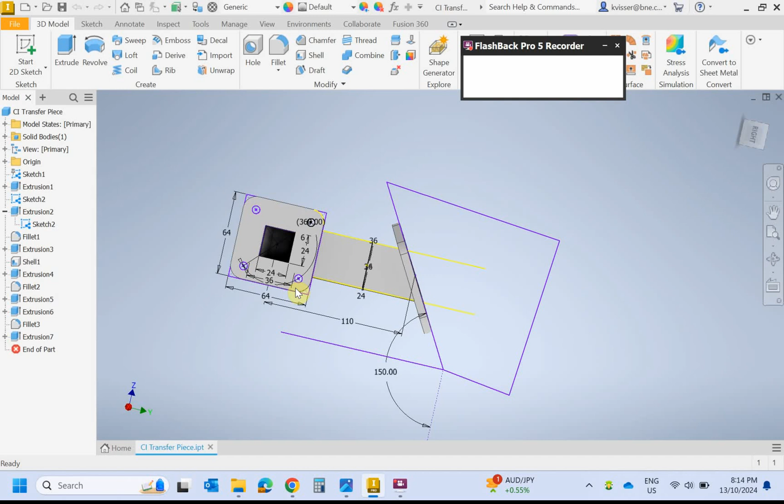Hey guys, just wanted to make a video on the transfer piece that you need to draw up. So there's a few different drawings floating around for this piece of assessment. I think they all come from the Boundy textbook.

But there seems to be a common error between the drawings, and it's the threaded hole. So for the purpose of this, I'm going to say that they intended it to be 6 holes at an M6. So we're going to model a diameter 6 hole here. We'll put a thread in it later.

When you draw this, it's pretty important. There's a few different ways you can draw it. I'm going to show you a method I've had the most success with when trying to do the shell command, because it seems fairly simple, but there's a fair bit going on here. So if you can't get yours to shell correctly, just make sure you really watch this video and have a look at the sequence in which the shell happens and where the shell happens, because if it's not in sequence, I haven't had much success with this.

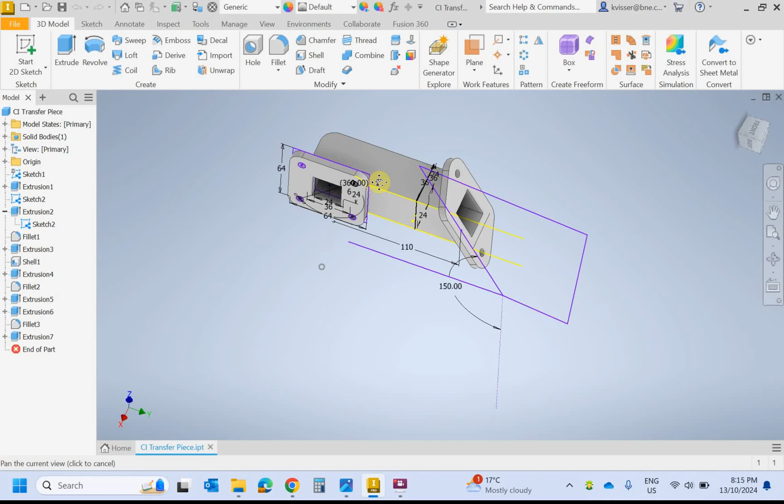So this is what it's going to look like when it's done in the 3D model. And we'll go ahead and get started because I'm going to draw it again for you.

So I'm going to start with a new standard, metric drawing, and I'm going to start a new sketch. If you take a look, my first sketch is actually going to be right in the middle there. The purpose and reasoning behind it will become more clear later on in the drawing, but it's to do with the shell, essentially.

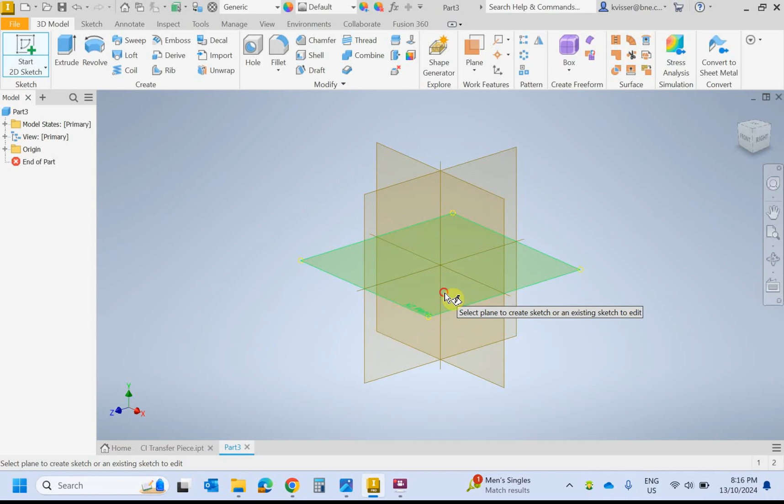So I'll start that new sketch, and I'm going to do a 2-point center rectangle. The outside dimensions for this tube is 36 by 36. I didn't first time around, but I will now.

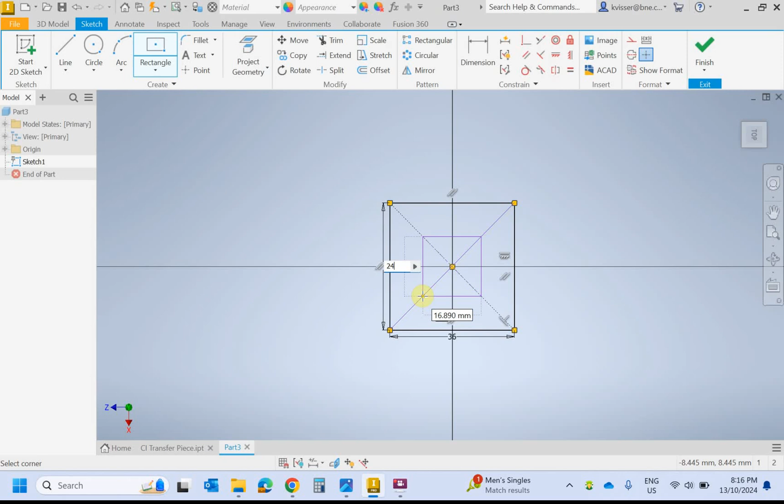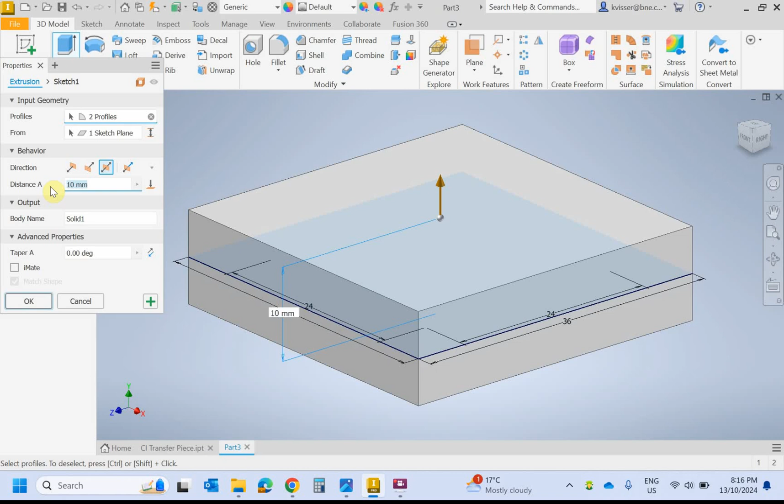I'm also going to put the internal for this, but I'm going to extrude it as a solid. Once again, that's for the shell we do later on. So when I go extrude, I'm going to select both profiles, do it symmetrically, and I'm going to need about 180 mil in this shape. The reason I say about is because part of this drawing, we're going to trim this down later. So there's my 180 mil.

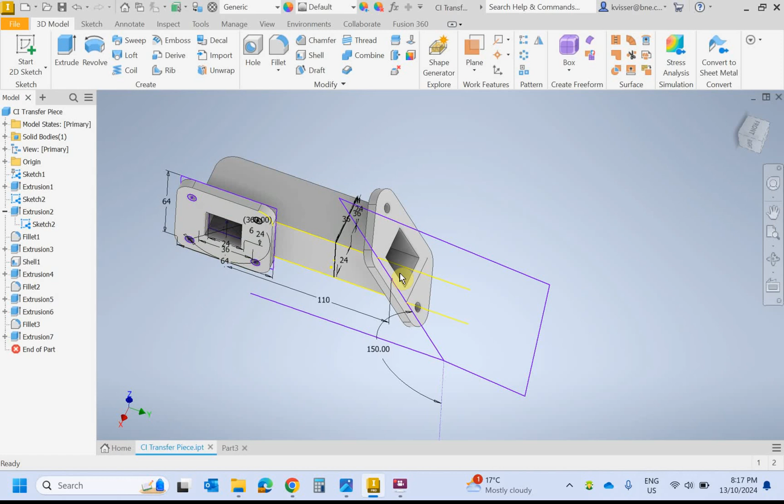Essentially what we've done is we've created this bit of pipe here. I'm now going to just do this part of the drawing, and then we'll extrude the other part. So if I select this face, I'll start a new sketch there. I like to just rotate it in the orientation, I've already sort of got it in my head as such.

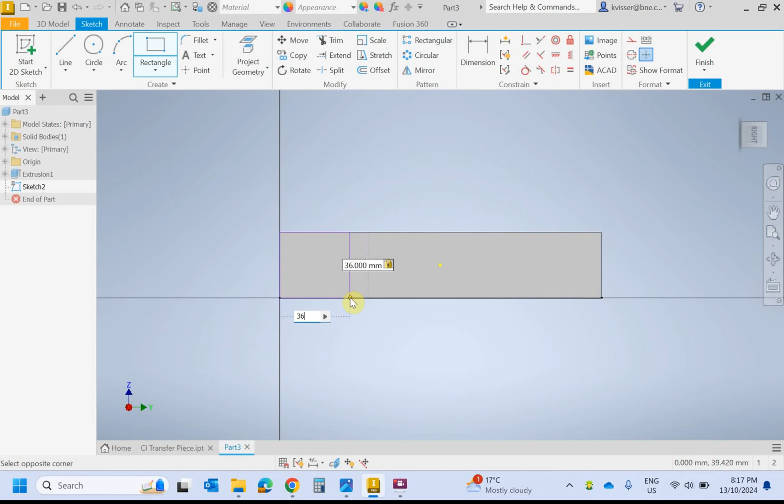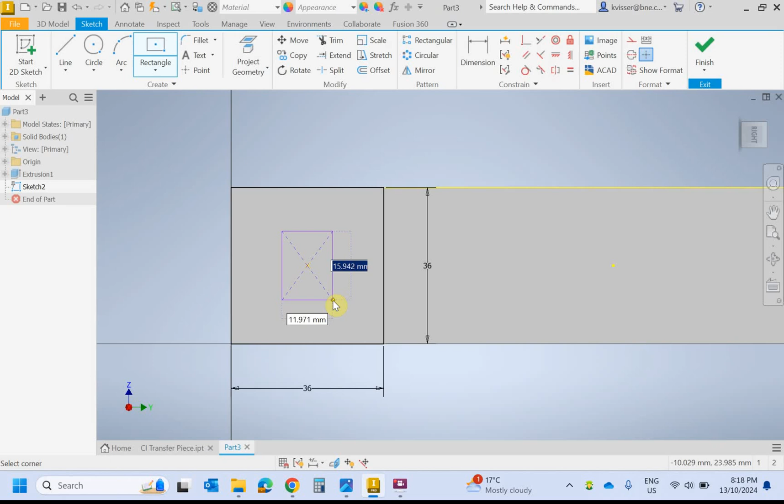So I'm going to do a 2-point rectangle this time, and just for ease, I'm going to do this one 36 by 36. I don't actually need the outside one there, but it's just going to help me to get my next one if I did it 2-point center. So it's going to find the center of there and the center of there, and it should predict it like it just did then for me. The dimension I'll need here will be 24 by 24.

So going back to our drawing, there's our 24 mil square, and there's our 36 by 36. Excuse me, something stuck in my throat. Now, that 24 by 24, the only reason I did the 36 was just to centralize it. You could have drawn the 24 by 24 and then used the dimension tool, same but different. Wouldn't really slow you down at all.

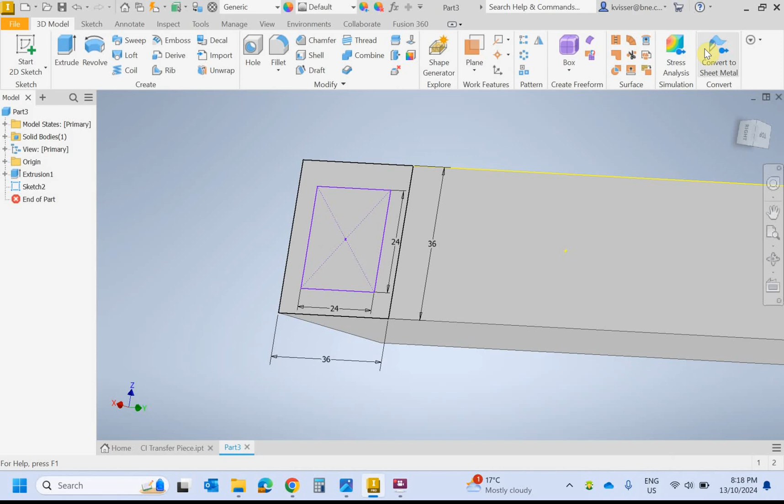So I'm going to finish that sketch. I'm just going to leave that there for now. I don't actually need to do anything with that yet. I've got a bit more stuff happening here, and I'll do it on the same sketch actually, so just open that back up.

Now, if you go to the drawing, this face says face incline 60 degrees to horizontal. So that's that face there. The key dimension that you need to pick up here is that from that center line, when they project it across, we're going to need 110 mil that way. Okay, so to get that, let's have a look.

So if I was to just draw a line, there's horizontal, and at the moment I'm getting a readout of 90 degrees, either way I'd do it. They wanted 60 degrees to horizontal, so there's 90, and if I start going down there, if I was to go 60 degrees, and that's reading 90, 90 take 60 will give me my 30. So I'm not worried about length, I'll just go tab, type in 30 for my degrees. That is now 60 degrees to the horizontal.

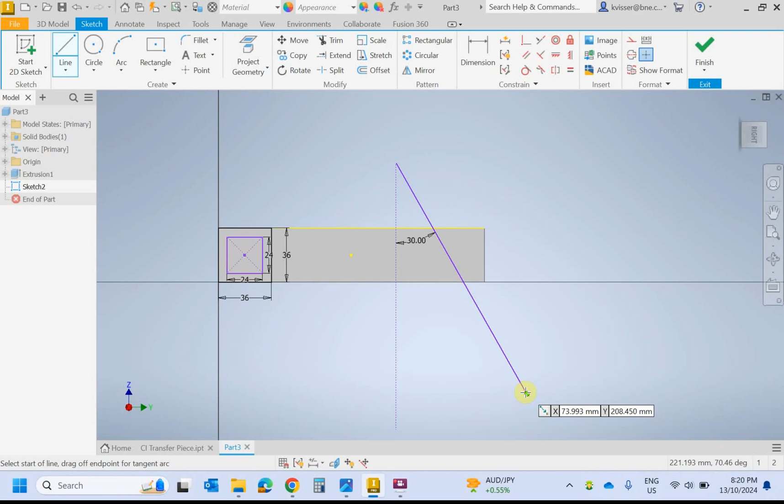And if you double check that, which you shouldn't have to, but draw a horizontal line and then dimension it. So before I create a profile here to cut this section off, I'm going to dimension it from the center of that one there. I'm hoping to pick up the center of this line.

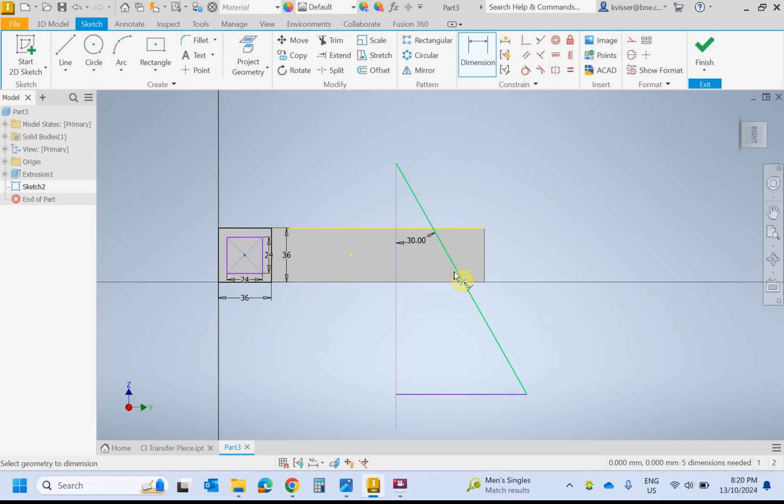Delete that for now.

Or why I'm not getting the center of it. I got it last time I did it. It's a bit of a bummer. Bear with me.

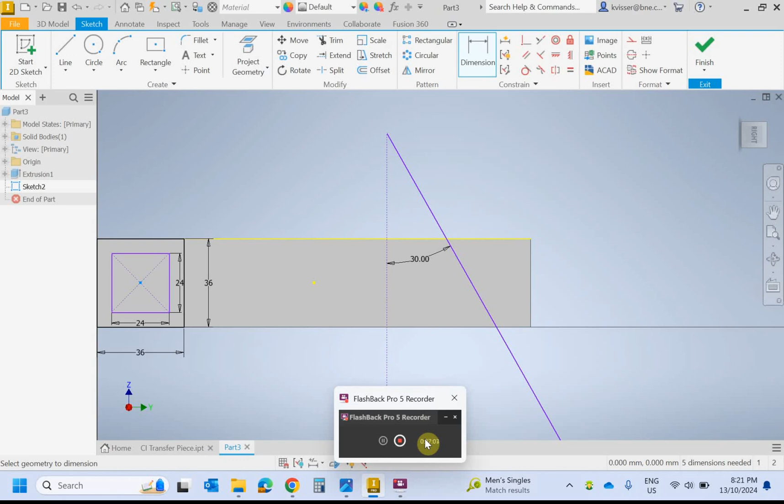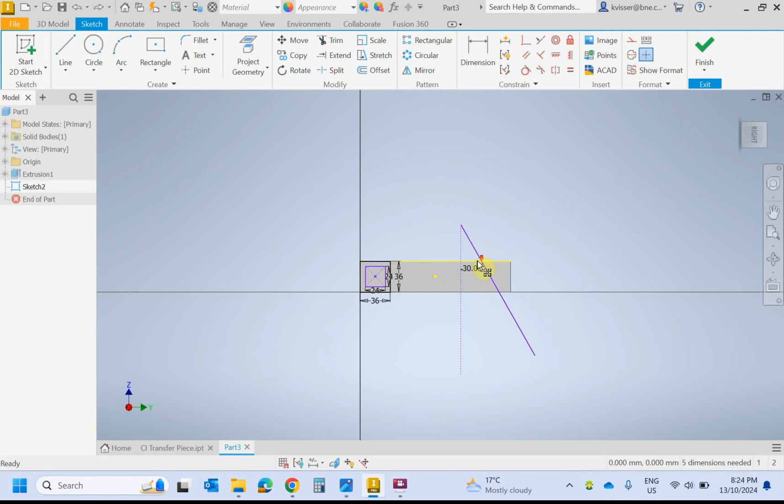Okay, so simple solution as to why that wasn't finding the center. I'm glad it didn't work for me - it didn't work for me the first time either, not sure why. However, because this line's not perfectly balanced between that shape, if you just trim it so that it is,

you can then go dimension from there to there. And that dimension needs to be 110, I think. 115, let's check - 110.

Okay, that sorted that out. So it was pulling that square across and not allowing me to drag that. So if you just lock off the component that is being dragged when you try and dimension, that will save any issues there.

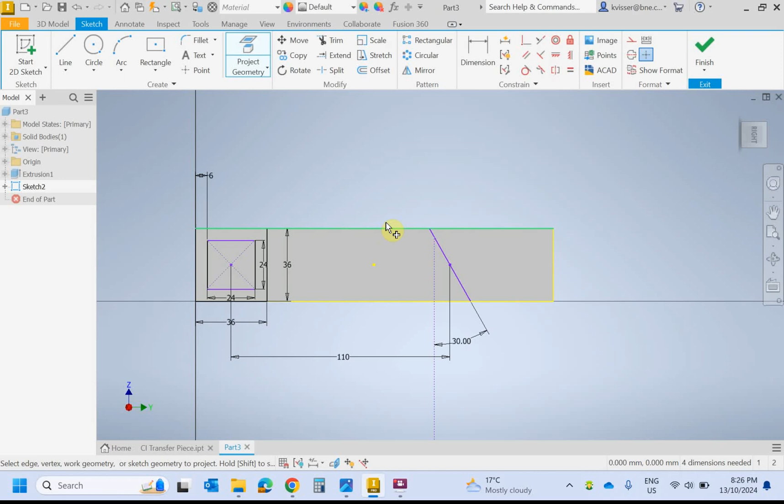So then the next thing I'm going to do, if it lets me, which it didn't before, I was going to use Project Geometry. Does it for the whole thing, that's all good then. And I'm just going to cut off this section here. So let's see if I can do that.

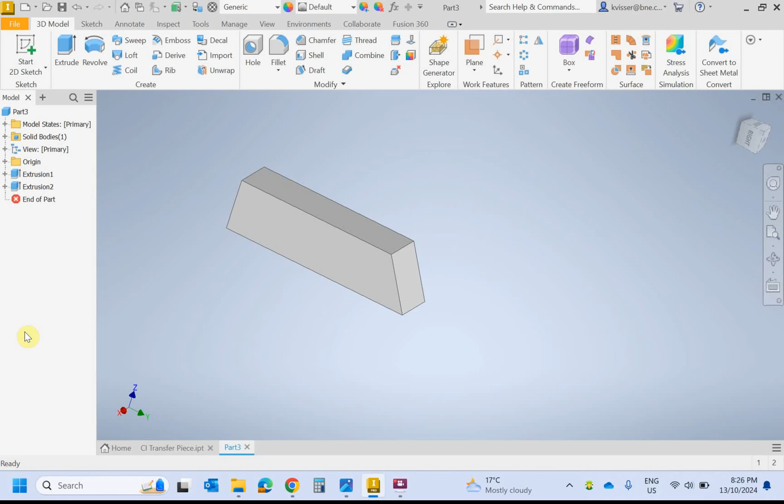So I can go the next step here, with my sketch 2. I need that back again because I want to do an extrude and then a shell. So to get it back, you right click on it and just turn on its visibility. I then have that geometry that I need.

So I'm going to extrude that surface inwards, subtract, and I'm going to do it to the wall thickness. If you take a look, we've got 36 and it's 24 square on the inside. So you do the math and it gives you a 6 mil wall thickness.

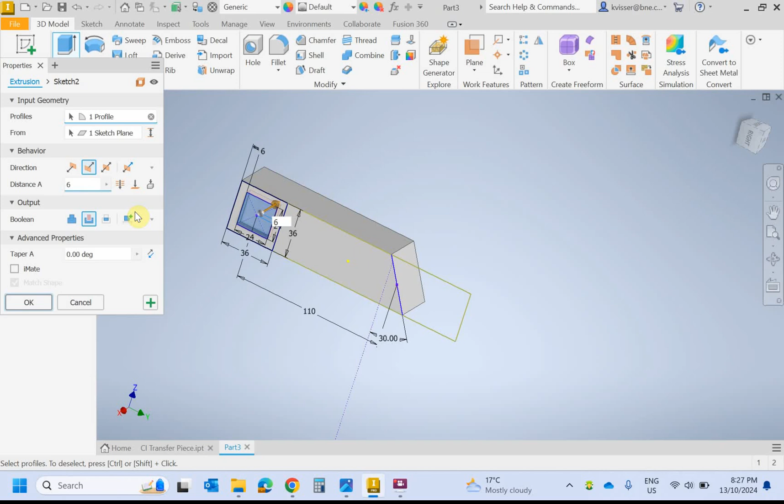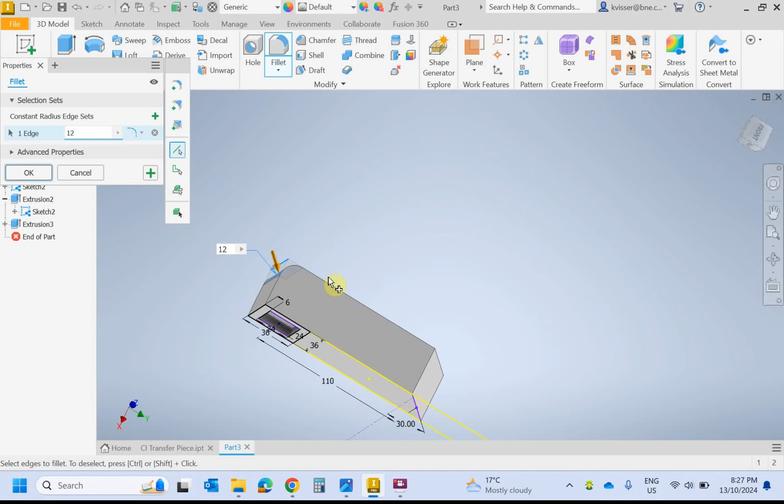So if I just make that 6 mil for now, that should work out pretty good. And I'm also going to put on my fillet on this outside edge, which is radius 12. I don't think it really matters if you do that before or after, but I like to do it before.

And so then I'll go shell, and I'll select that surface. Give that a 6mm wall thickness. And so you can see now, gives you a preview of what it's going to do. It's copying that internal wall there, and it's giving me that 6mm thickness.

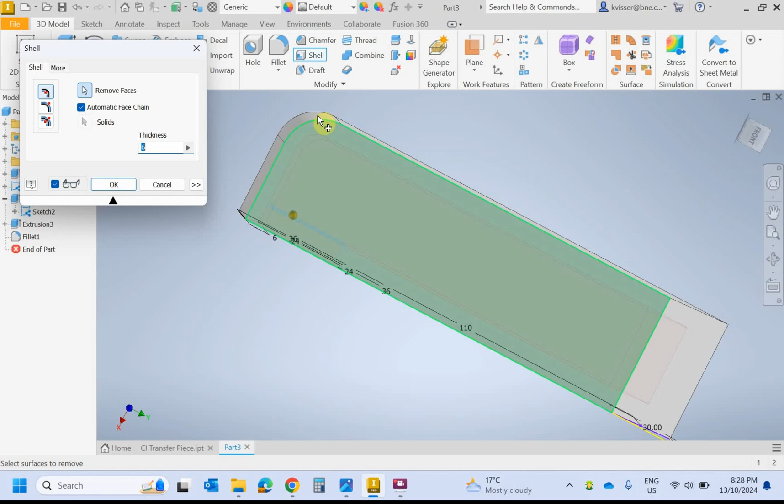So you'd like to think that if you did the fillet afterwards, it would update it, but I think it's nice to get the outside shape first before you do the shell. Okay, you'll note that it didn't cut through here, and that's why we did the drawing in the middle there before. That would have been an easy solution later on if you didn't think about that, but we'll just continue with this drawing here, and we'll pick up on it.

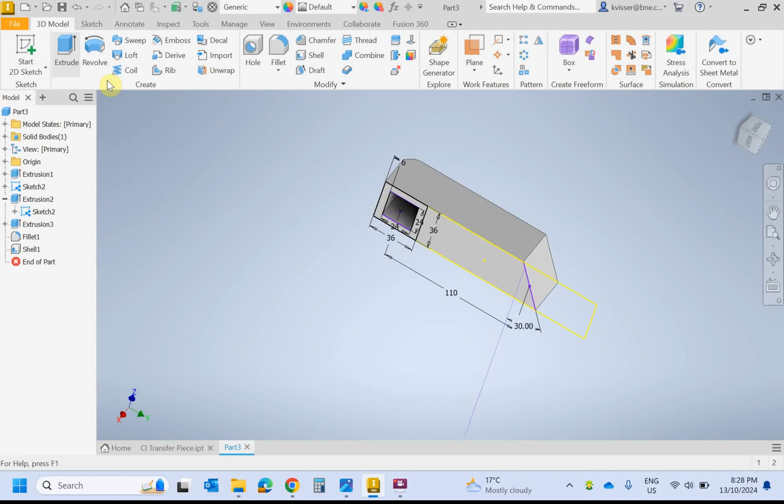So I might start a new sketch now, and I'll do it on this face, and we've got this 64 by 64 plate to do here. It's got 10mm radiuses in the corner, and I think that's where the issue lies with these holes.

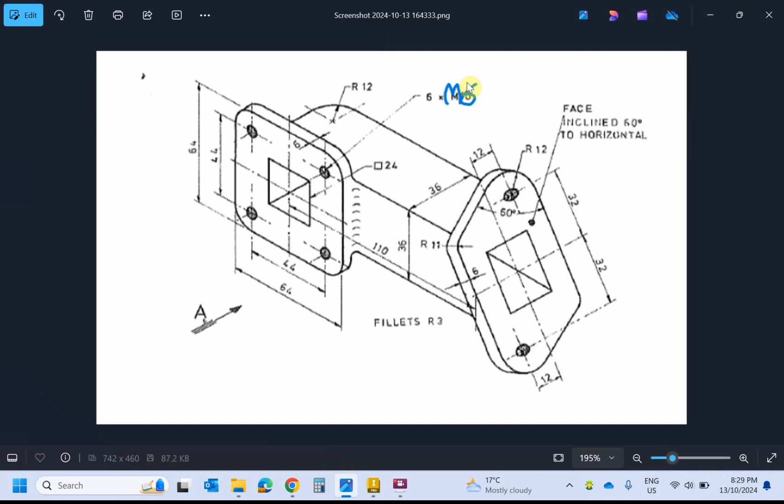So, and the error is - if you look at the other versions of it, it gives you an R10, which makes more sense. So that's supposed to be radius 10, and then that hole, if it's proportional, would be a 6 in my eyes. I'm happy to argue that with whoever.

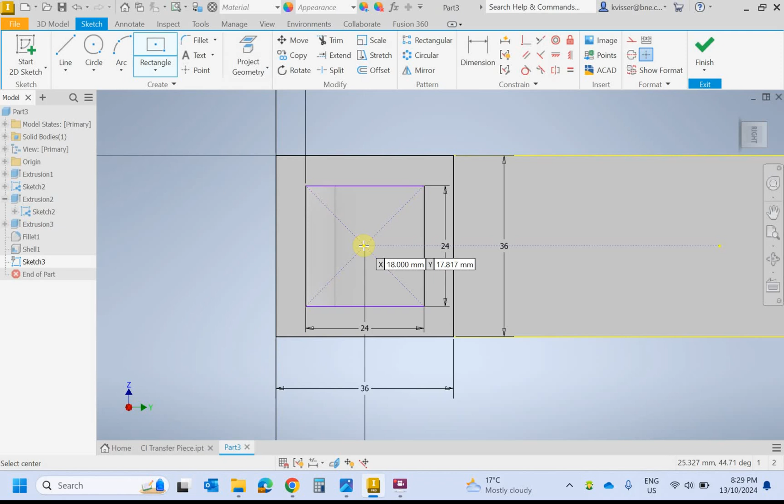So let's go. I'm going to do rectangle, 2-point center, and I'll pick up, hopefully I'll pick up from that center. Didn't quite do it. I'll go again.

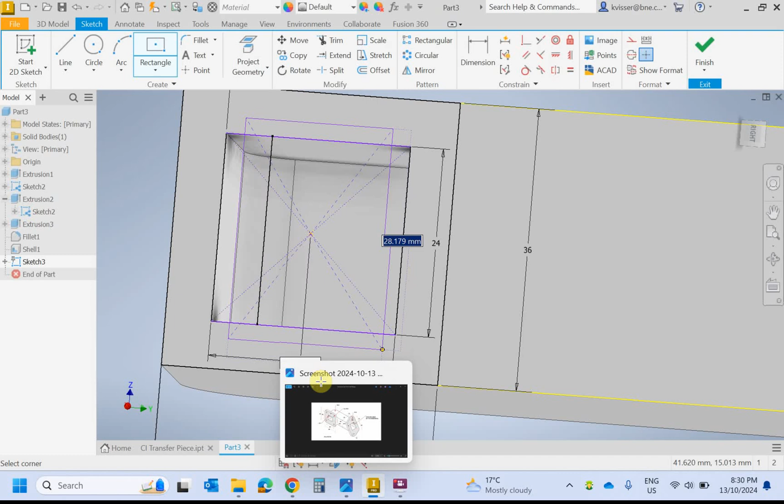Just going to do projected geometry on that face so that hopefully it picks that up better. Okay, sweet, and it did. So our 64 is what we're aiming for. So I go 64, tab, 64. That gives me my outside of that one there.

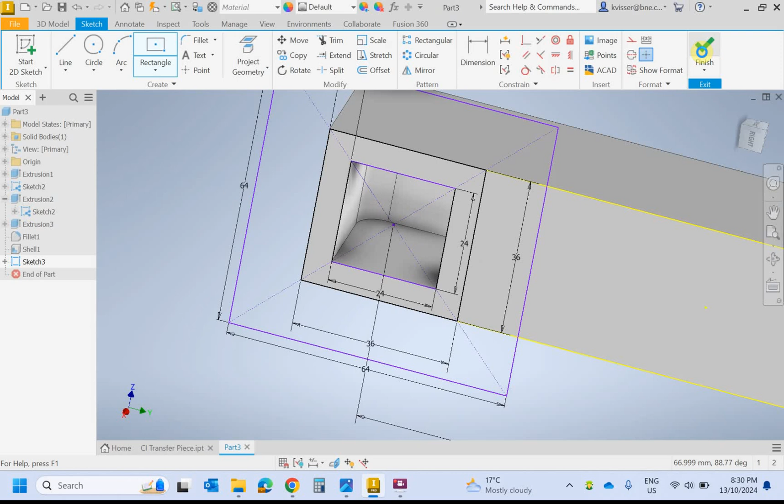I've then got a - I'm not going to do the holes yet, and I'll show you why. I'm just going to go finish sketch, and we'll extrude that face and that face out 6mm.

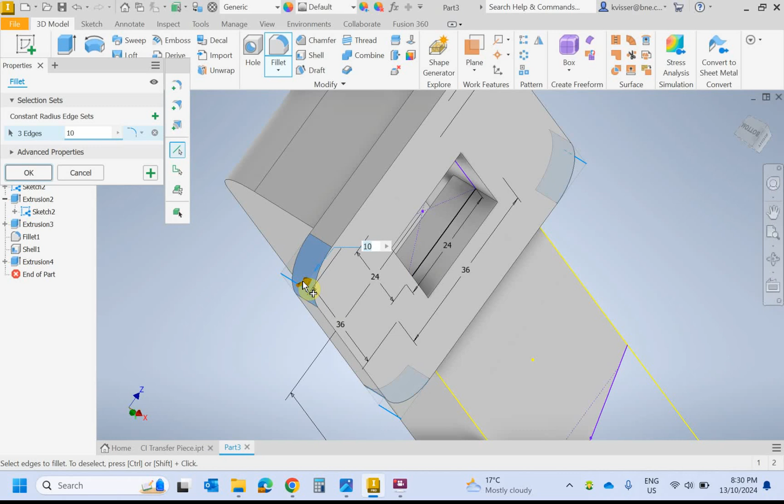Sweet. If you then do your fillet, which will be a radius 10, shift middle mouse wheel to orbit around. That'll give you your fillet, and then I reckon that makes it easier to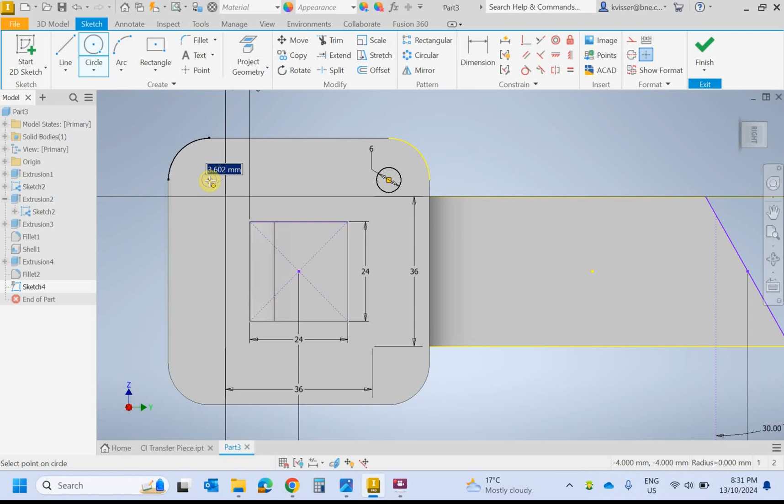start a new sketch. And then if you're going to use circle or point, it wouldn't really matter, but you can select that super easy and whack in your 6. So just by highlighting on there, it gives you the origin of that radius.

Not using any dimensions to constrain, simply just selecting where that radius came from for the fillet.

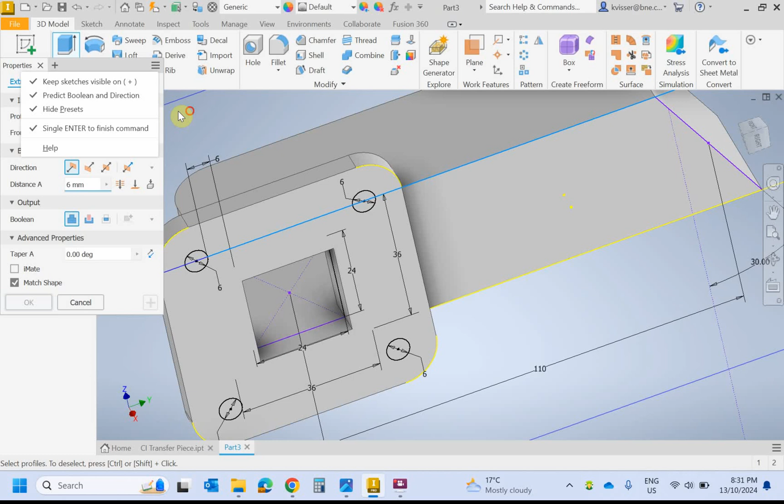Finish sketch. I'm then going to extrude. Oops. Try that again. Extrude these with a subtract.

So that's got that looking pretty sweet now. This little flange over here can be a bit tricky, so I'll show you that as well. I wouldn't mind rotating that view around.

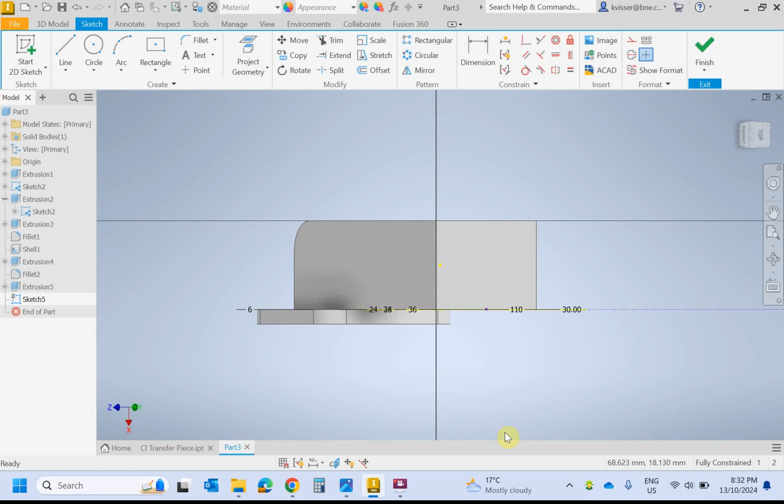I use the Look At command. There we go. So I've got this face here now.

I'm going to use Project Geometry once again, and that's going to help me with my selection. And I'm going to need a rectangle. Looking at this here, I won't bore you with the math, but you've got 12 and then radius 12, so that gives you 24. That's just to get to halfway, so that'd be 48 mil across. Then if you do the math on these ones here, that's 48 and then 88.

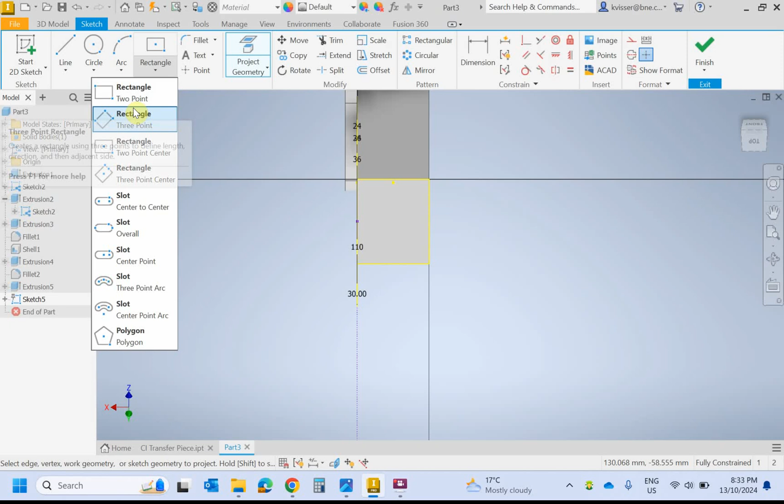So let's go with a 2-point center, and I found the center there. And it's found the center for me, so it's projecting them through, which is great. And we want a 48 tab 88. Enter.

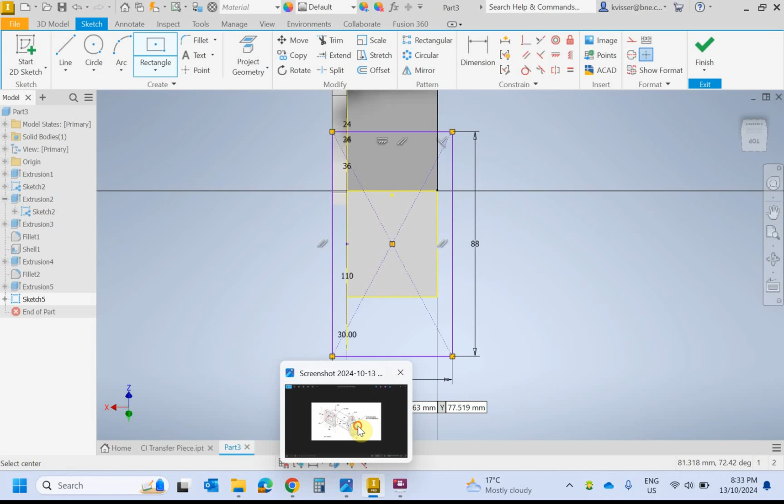Now it would be awesome if you could just use a fillet there, but because there's this line here that's at 60 degrees, you can't. So we'll start off by just putting in a circle at diameter 24, and we'll place that in this corner, and then we'll use like a tangent.

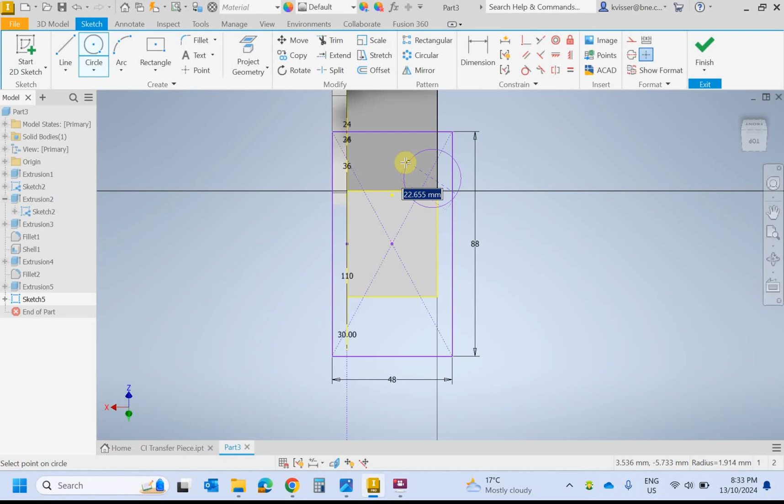So I want a circle. I don't want it to click to any other geometry, I just want it to be able to freewheel around. So we'll go 24 mil there, and now I'll constrain it to the top, 12, and that one to be 12 as well.

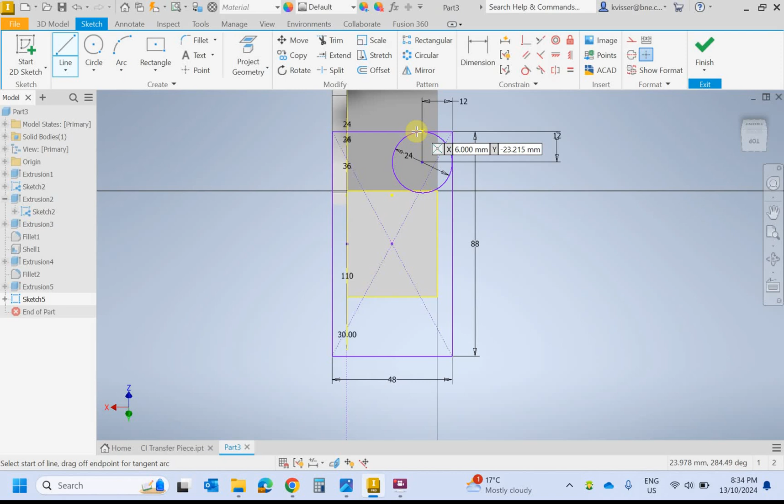Boom. I can now grab a line, and I want to go from the tangent of this circle. So that's not going to come up unless you go right click, snap points, and tangent. So I'll left click now, so you can see that little tangent symbol come up. I'll left click now, I'll pull that out this way.

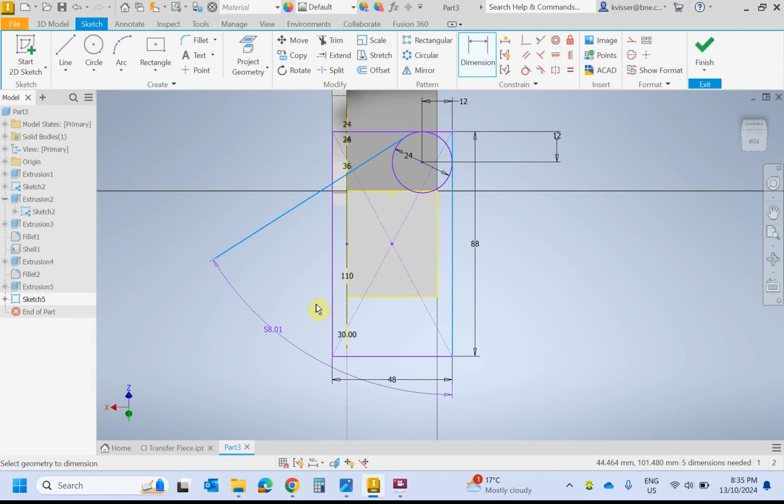Now it says it needs to be 60 degrees from that line across. Easiest way to do that is just to go like that and go dimension, and you'll see that the angle symbol comes up. Left click, I can drag that out, and now I can make that 60.

And I'm going to want a 6 mil hole in the middle of that part, and it doesn't mirror, but this shape rotates around. So before I do that, I'm just going to go trim and tidy it up so that when I do a circular pattern, it's doing the geometry that I want.

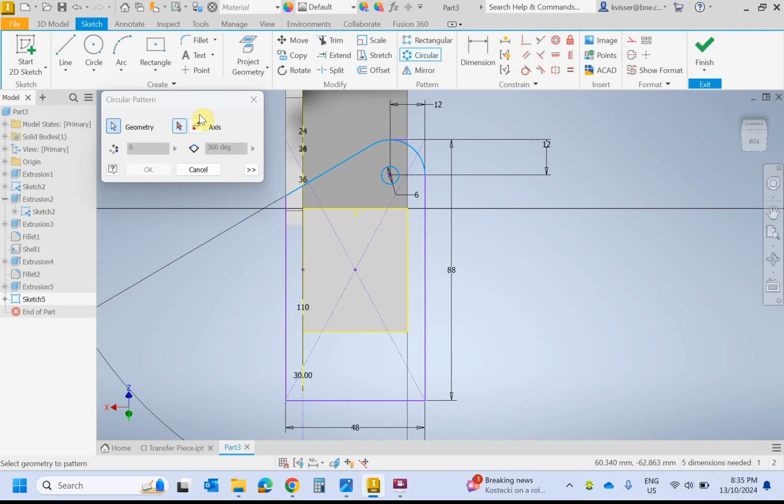Cool, pretty happy there. So let's go with a circular pattern. Select the geometry you want to do. The center point is the center axis here, and I only want it to occur twice.

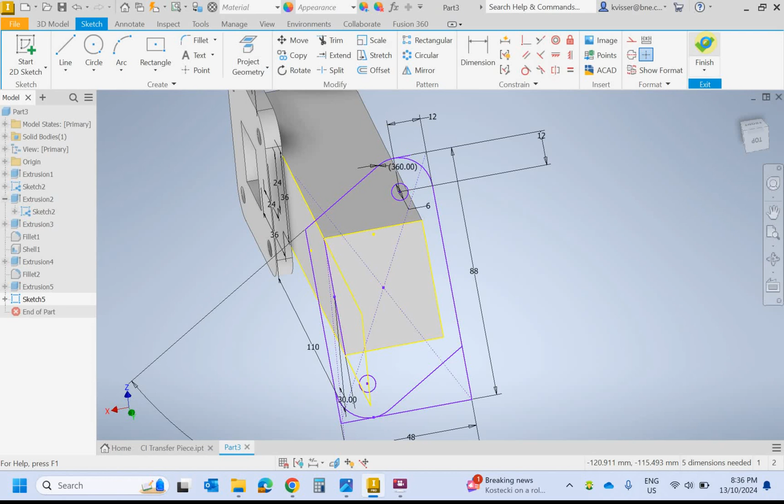So that's done there. I should be able to extrude that shape. If not, I just like to clean up any unneeded lines. It will help your computer decide what's going to happen. But this should work out really good.

And if I select extrude there, I'm happy there. It's already predicted that I want to go forwards or down, and that's pretty important.

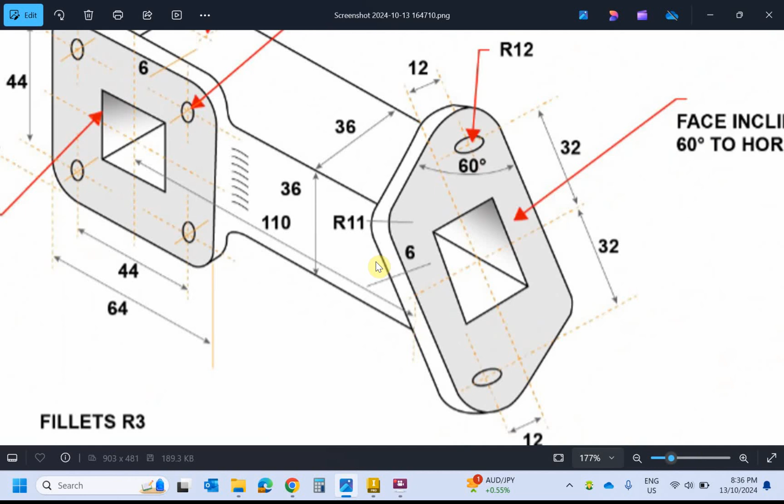So take a look at this drawing. This is one of the drawings I've seen of it, but that line there comes to the outside face, and then same with this version. It's to that outside face, so the 6 mil in.

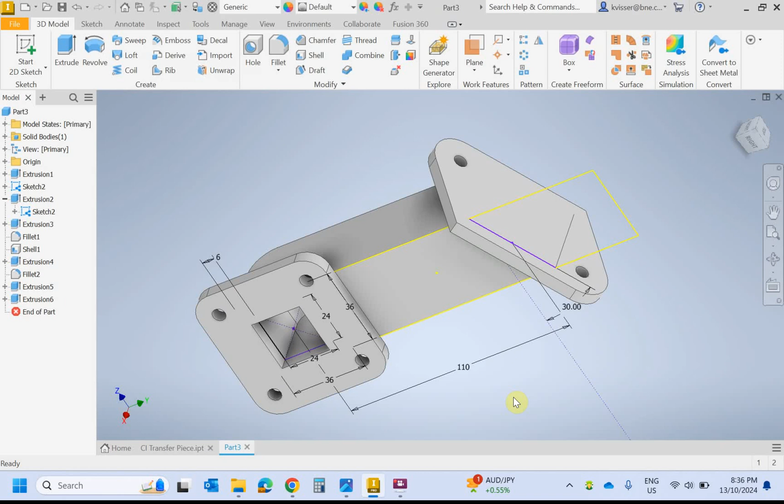Okay, so that's looking pretty good there. I'll click OK. I still have this issue where I need to break through this surface. I've got a fillet to do as well, and that's a radius 11. So I'll quickly do the fillet.

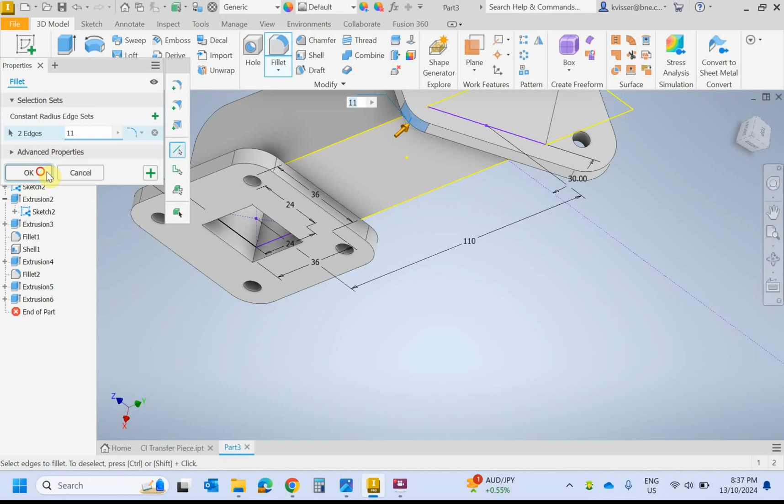Shift middle mouse wheel to orbit. There's your fillet. And so now to punch through there, I'm going to use that sketch that I had from the very, very start. And so that was from extrusion 1, and that's sketch 1.

I'm going to right click on that and I'm going to turn on its visibility. I might need to use wireframe to select it. I'm not sure, we'll just have a go.

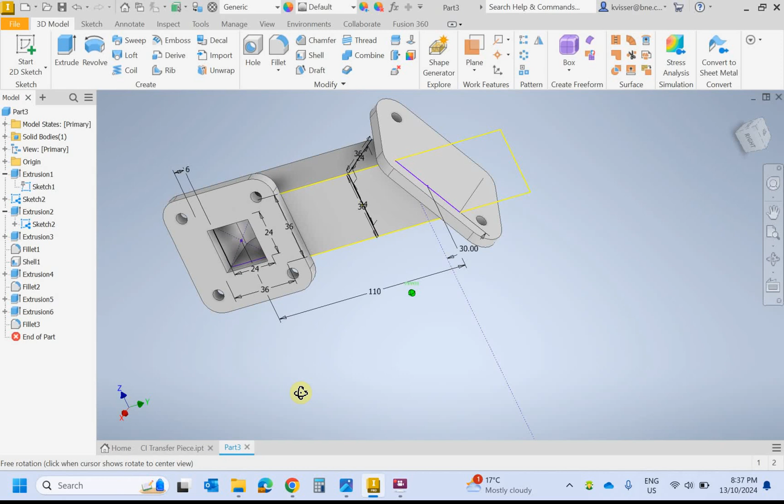Extrude, and no, it's coming up nicely for me so I can see that. That's that middle face. I'm going to select to subtract and through all. And you can see it's punching it the wrong way. So I'm just going to change my direction over here, and that will punch that shape out there for me.

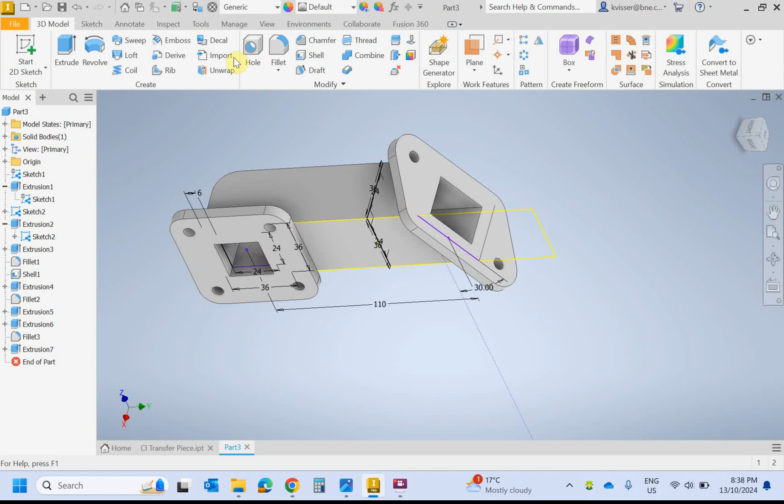If you couldn't see that face for whatever reason, because I've had that issue before, I didn't then, but I'll show you how to overcome that. If you go View, Visual Style, Wireframe, I can see my sketch really nicely inside of that shape. So that will give you a wireframe of your model, and that's under View. I'll then go back to Shaded with Edges to get a better representation of what's happening.

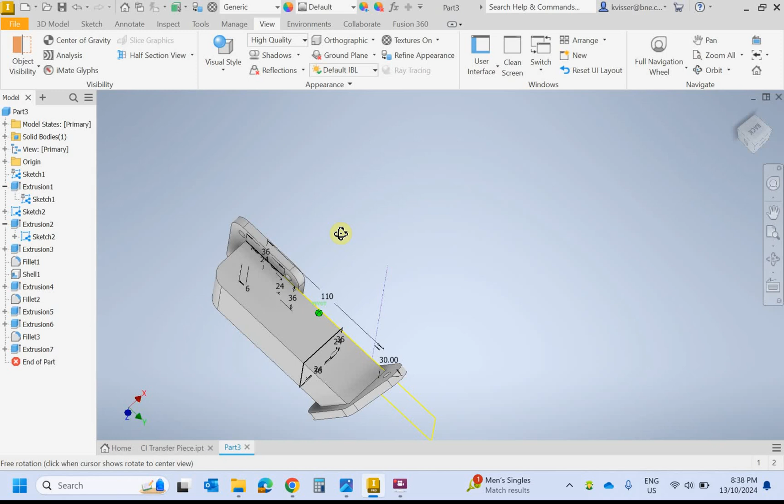So that's how you would model up that cast iron transfer piece. I think that's what they're calling it.

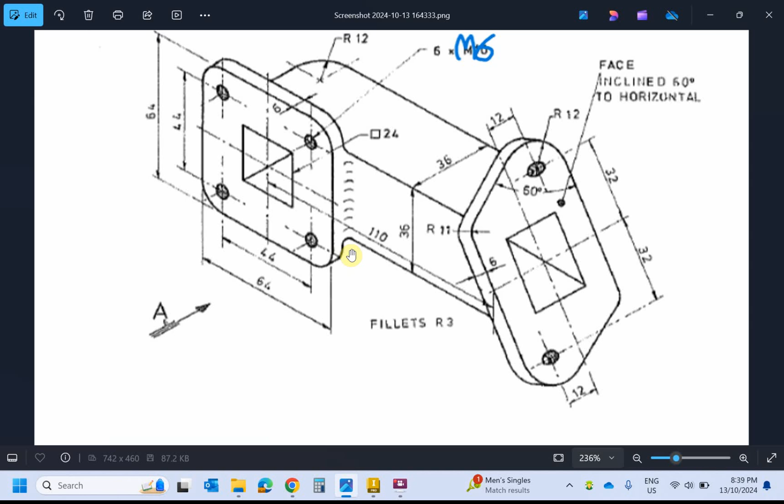Now, worth noting, and I won't show you how to do it, you can do it yourself. There's fillets all over this thing, and it says here, all fillets, radius 3. And I don't believe there's supposed to be fillets inside of here because they haven't drawn it to show that at all, but there's definitely fillets there. I think so, definitely fillet there, and there must be one on the back edge.

We'll have a look at more of that in class, but the tricky part is modeling up these ones here. So hopefully that helps you out, but you will need to put in those 3mm fillets at least on these surfaces.